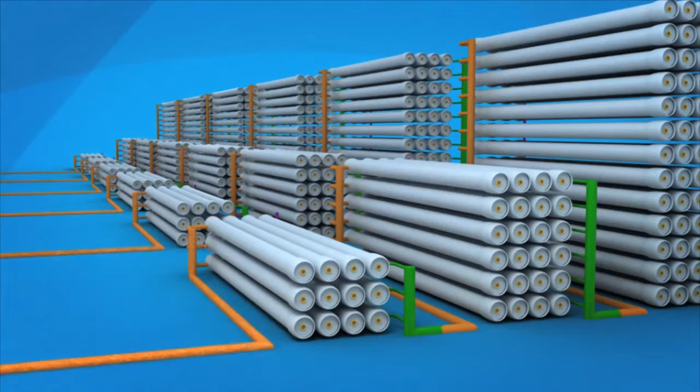The St Mary's Water Recycling Plant uses reverse osmosis to further treat wastewater after the ultrafiltration process. Reverse osmosis membranes are constructed from a membrane flat sheet.

It is comprised of 3 layers: a polyester fabric support base, a microporous polysulfone layer, and a 0.2 micron thick polyamide barrier layer. The polysulfone layer strengthens the very thin barrier layer. It is the barrier layer that removes nutrients, chemicals, bacteria, and viruses from the water.

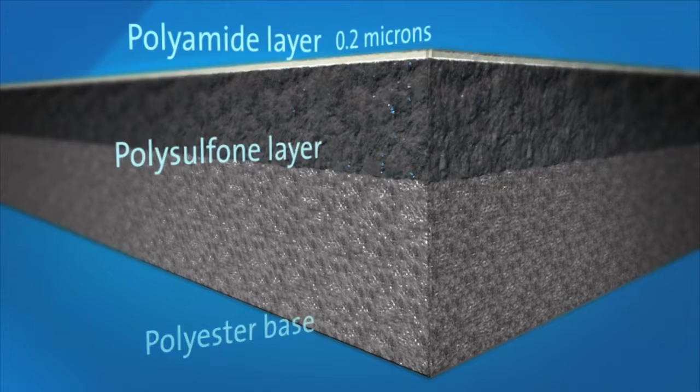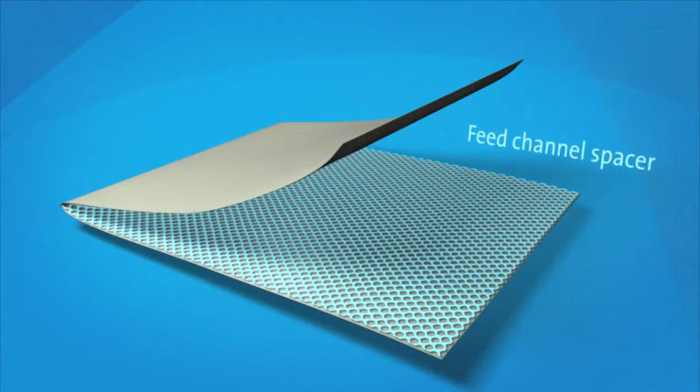The membrane flat sheet is combined with a sheet of feed channel spacer. This provides turbulence and creates space between the membrane sheets for the feed water.

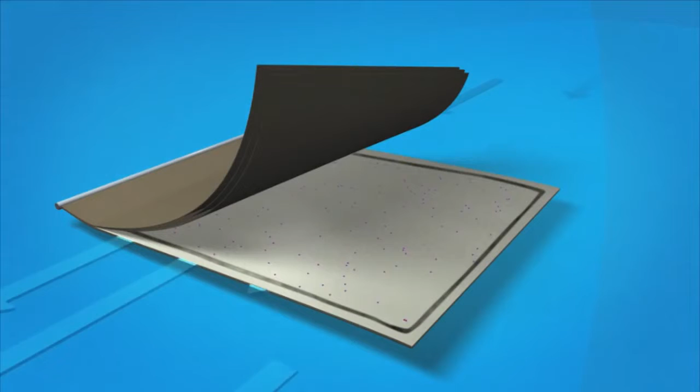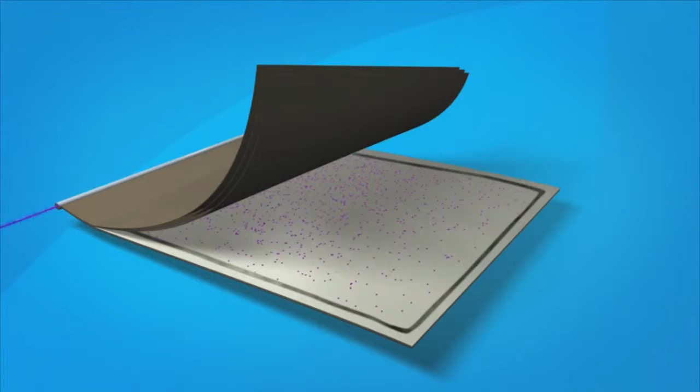A sheet of permeate spacer is added to the membrane sheets and feed channel spacer. This enables the final recycled water product, or permeate, to flow evenly across the entire membrane surface, even under high pressure. The back of the membrane is completely sealed to the edges of the permeate spacer. The membrane sheets are glued along each of the 3 exposed sides and rolled around the core tube.

Feed water is forced through the feed channel spacer and into the barrier layer of the membrane. Water passes through the membrane surface into the permeate channel. It flows in a spiral direction and collects in the core tube. This water is the final recycled water product, or permeate.

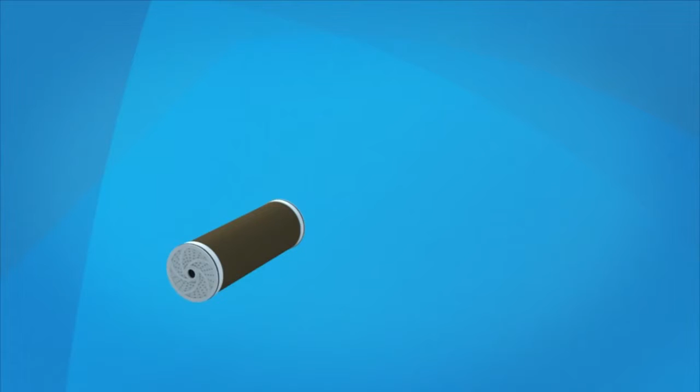There are 7 spiral wound elements loaded in one pressure vessel. Once the end adapter is connected to the last element and the pressure vessel is sealed, feed water can be introduced. Feed water is pumped at high pressure into the vessel.

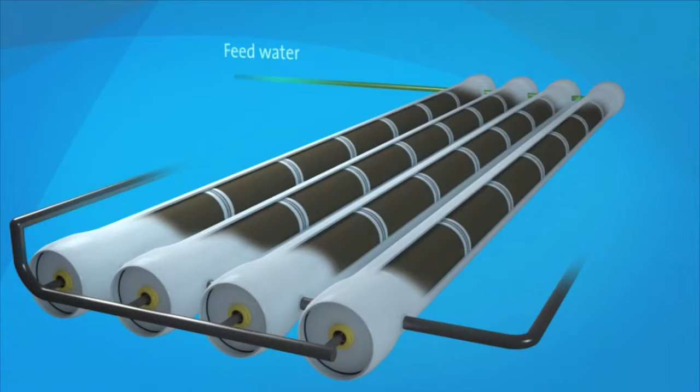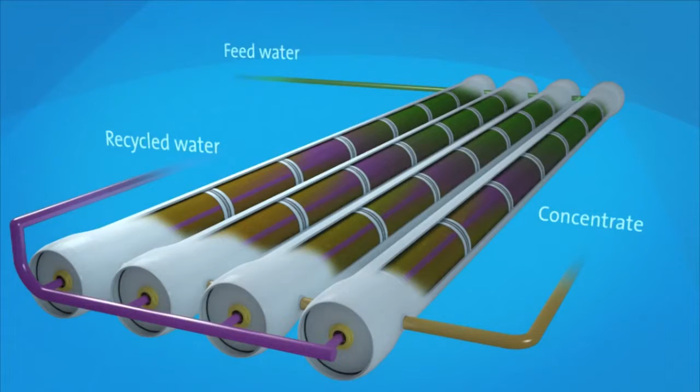As it travels, small molecules like water pass through the membrane, while larger particles such as salt, bacteria, and viruses do not. The final recycled water product is collected from the end of the elements. The concentrate or reject from that vessel flows to another stage, producing more recycled water.

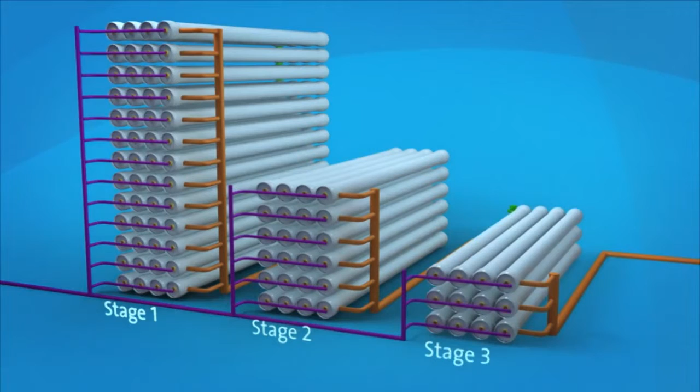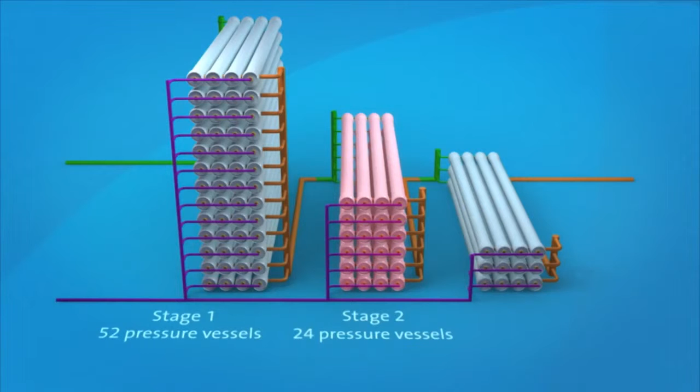At St Mary's, there are 6 reverse osmosis treatment trains, each with 3 stages. This design produces the highest amount of recycled water with reduced concentrate waste. Stage 1 has 52 pressure vessels, Stage 2 has 24 pressure vessels, and Stage 3 has 12 pressure vessels.

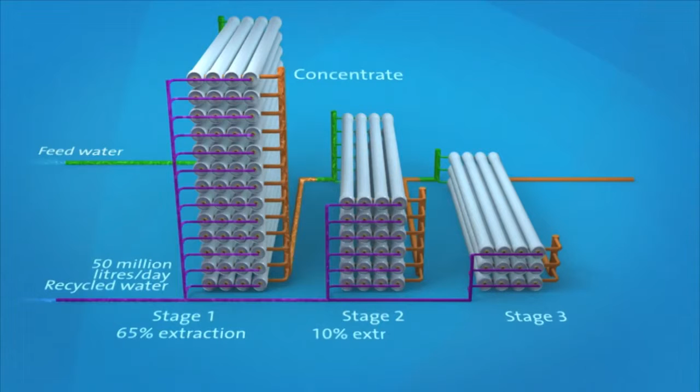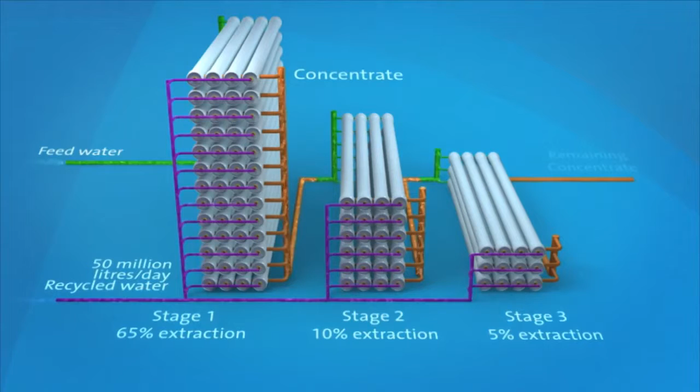58 million litres of feed water enters the reverse osmosis system on a daily basis. As the feed water passes through each stage, more recycled water is extracted. 65% of recycled water is extracted at Stage 1. The remaining 35% is passed through Stage 2, where a further 10% is extracted. The final 25% is passed through Stage 3, where the last 5% of recycled water is extracted.

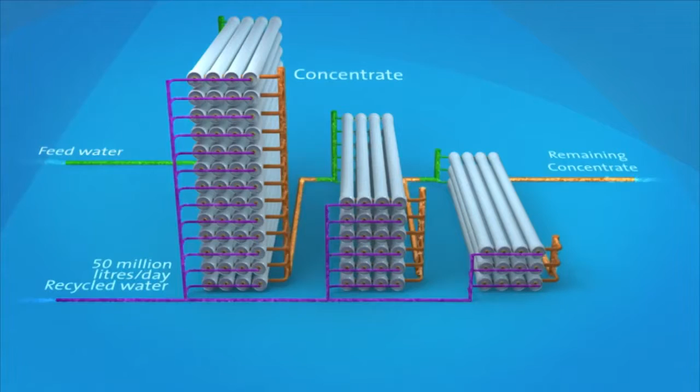80% of all feed water is recovered as recycled water. An average of 50 million litres of recycled water is produced every day at St Mary's. The remaining concentrate contains so much salt and impurities that to recycle it would not make economic sense. This concentrate stream of 8 million litres a day is sent to North Head Wastewater Treatment Plant, where it is treated and released into the ocean.